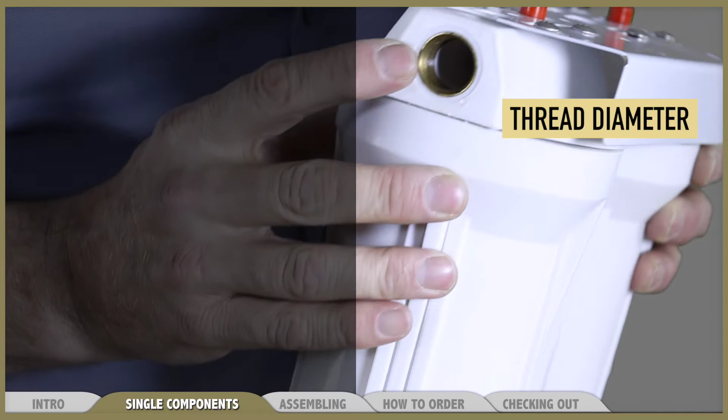When choosing the filter housing, make sure the inlet and outlet are 3/4 inch, the standard diameter thread on most shower hoses. Transparent filter housings are usually a little more expensive, but they allow you to see when some types of filters get dirty.

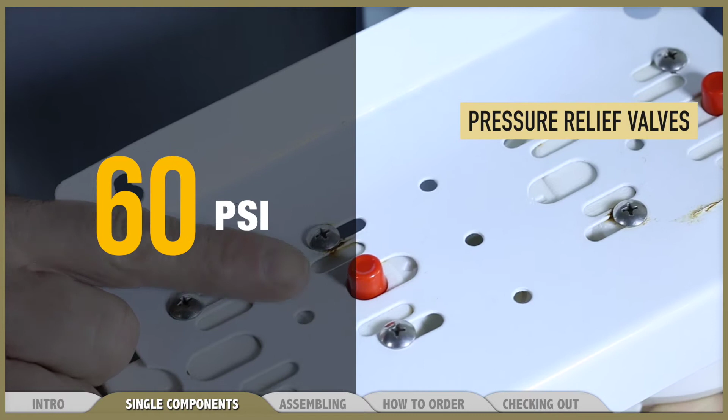Pressure relief valves are only useful if your water pressure is 60 psi or higher. In most bathrooms, it is below 45 psi, so unless your water pressure is exceptional, there is really no need for this feature.

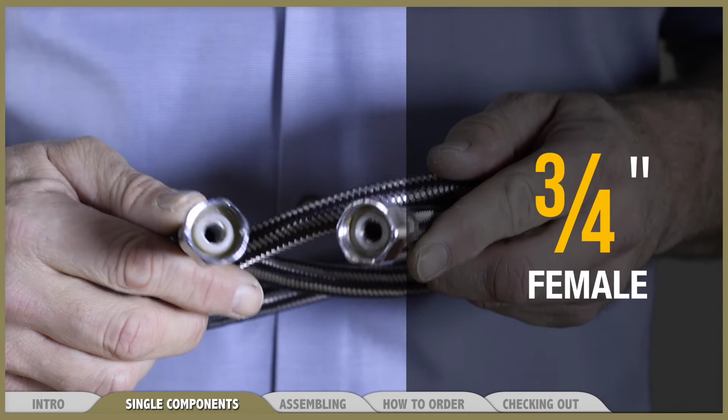For the hose, make sure it has 2 identical female 3/4 inch ends that will fit your L-shaped connectors. This one is about 1 meter long, which is long enough to reach from my shower faucet to where the filter housing will sit. This example has a built-in plastic wrench, which is handy.

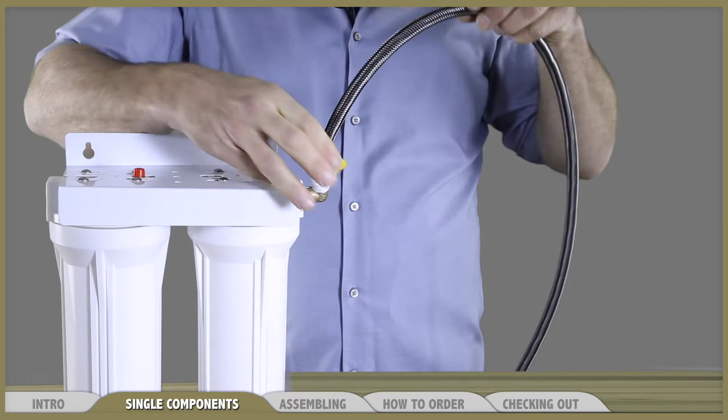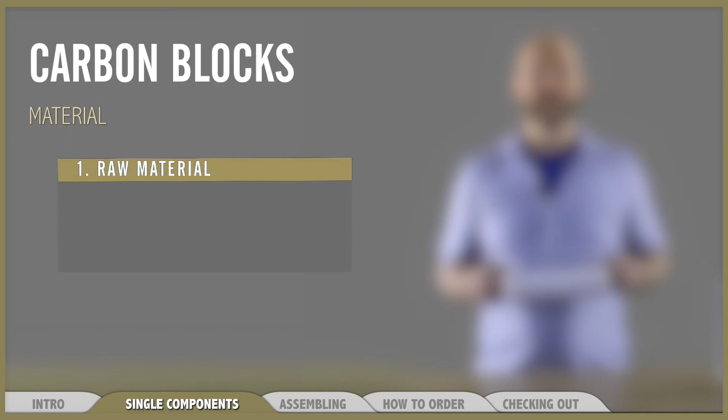Carbon blocks are the most important component of the whole system. The quality of the carbon block will determine how often they need to be changed and how many types of contaminants will be removed. Usually the best carbon blocks are made from coconut shell activated carbon powder.

But be careful, some activated carbon filters are not designed to function well with hot water, so be sure to choose a carbon block rated to at least 45 degrees Celsius.

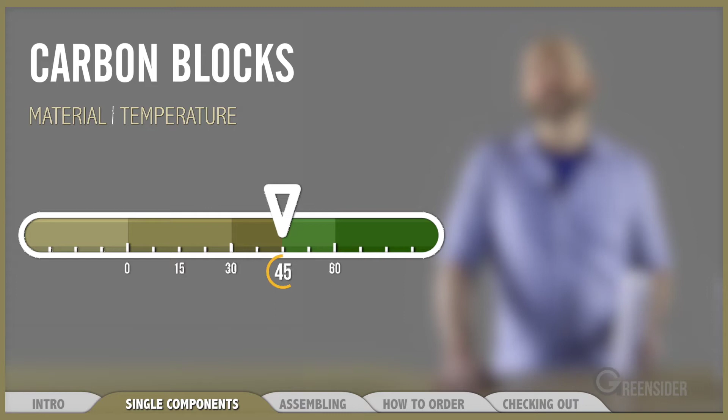The lifespan of the carbon block is measured as an iodine count number. Cheaper filters have a lower iodine count number, with high-end filters having an iodine count number up to 1600.

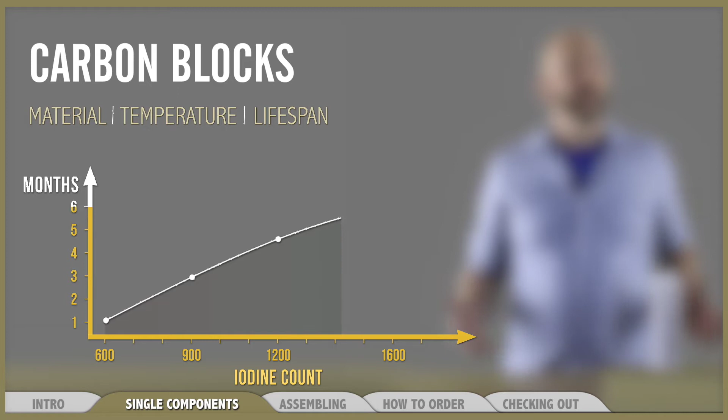The level of filtration is measured in microns. A finer filter will remove more contaminants but give a lower flow rate. A coarser filter will retain more of your water pressure but remove fewer contaminants.

In my home, I have 2 systems, one for the bath and one for the shower. As I have young children, I have chosen a very fine filter for the bath water as I'm concerned about all contaminants, including heavy metals. For the shower, I have chosen a coarser filter so I can quickly get the shampoo out of my hair.

Firstly, we wrap both threads of the connectors with Teflon tape. Looking at the connector from the end, we should do 5 or 6 wraps in a clockwise direction.

Then we screw the connectors into the filter housing. Once it is finger tight, use the joint pliers to tighten it a little more.

Now we take the new hose and connect the shower faucet to the side of the housing labelled in. Then we simply connect the shower hose to the side of the housing labelled out.

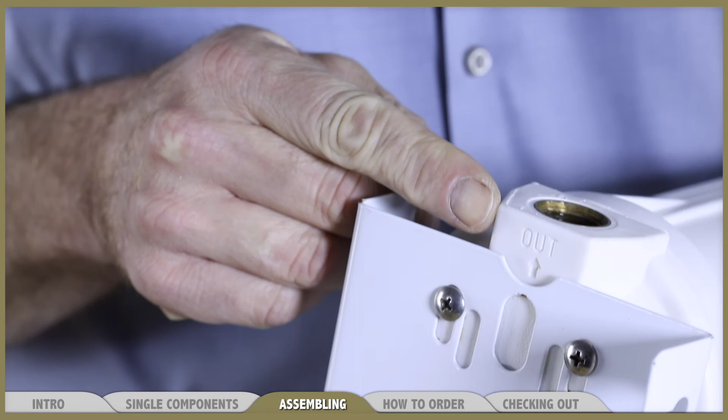Your filter housing will come with this special wrench. Simply unscrew each filter housing and insert the filter. Tighten by hand and finish with the tool.

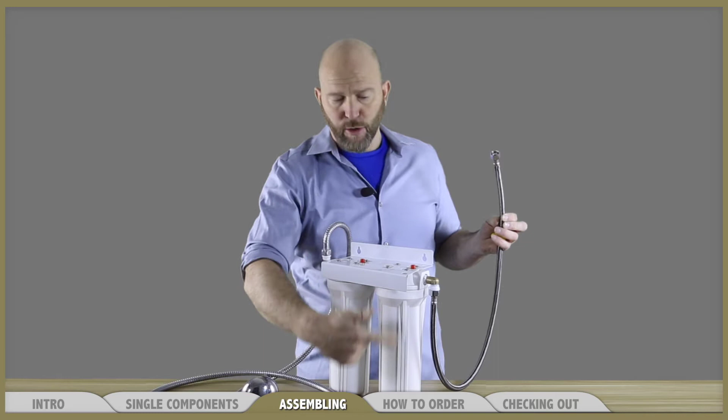So, when you put it all together, it's going to look like this. Your shower faucet connects to the in, your water goes through these 2 filters, and hey presto, you're finished. You're ready to go.

Now it's time to get onto Taobao and start ordering. A 10-inch 2-stage filter housing in Mandarin is 10寸2级净水器. Scroll down the results and look for the housing type which suits you best in terms of colour, pressure relief buttons, brass or plastic threads. In general, any housing priced between 80 and 100 RMB should be fine.

For the 1/2 inch brass connector, now we type in 4分铜90度弯头. Scroll down and choose a pair of L-shaped brass connectors and put them in your shopping cart.